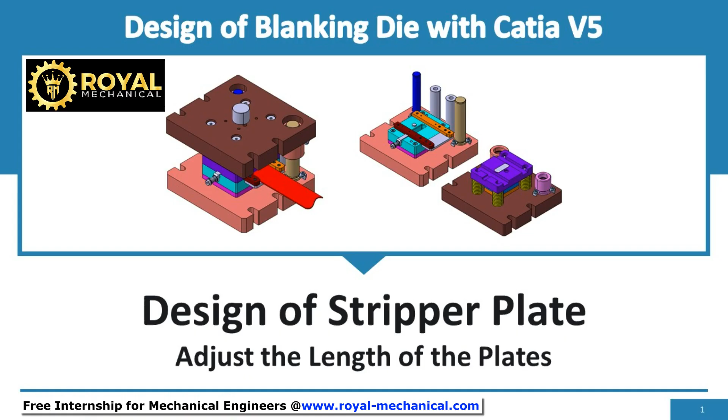Welcome. In this e-learning module, I shall demonstrate and understand how to adjust the length of the plates. In the previous lesson, we had assembled the precision shoulder bolts and the stripper springs.

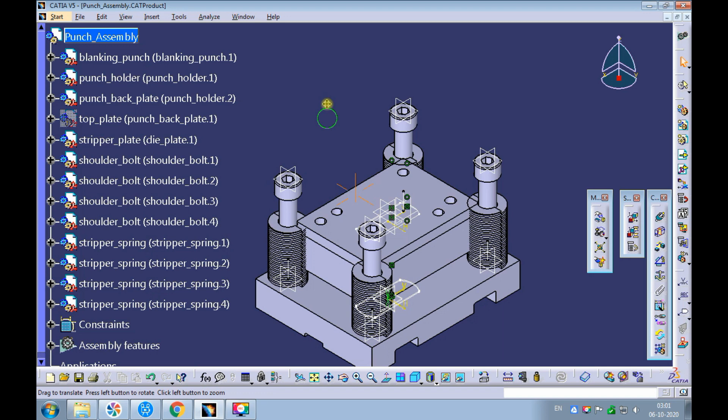Hide the top plate. Observe there is an interference between the springs and the punch holder and the punch back plate. By increasing the length of the stripper plate, we can avoid this interference. Right-click on the stripper plate and open it in the new window.

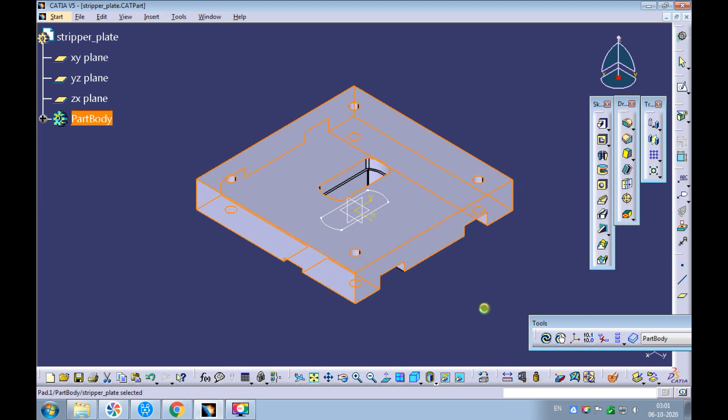Increase the stripper plate's length by 40 mm, by adding 20 mm to both the horizontal dimensions which define the length of the stripper plate. Swap the window to the punch assembly. Update the assembly. Observe the interference has been eliminated.

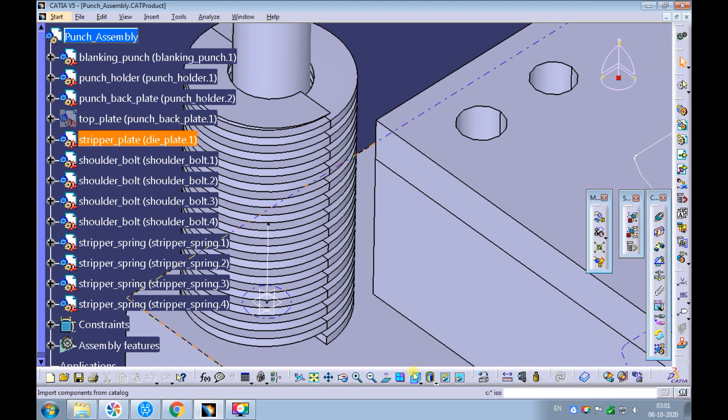Measure the distance between the stripper spring and the edge of the punch backplate. The measured distance is 8.29 mm. It is better to maintain a 5 mm to 10 mm gap. Hence the design is OK. Unhide the top plate. Right-click on the top plate and open it in the new window.

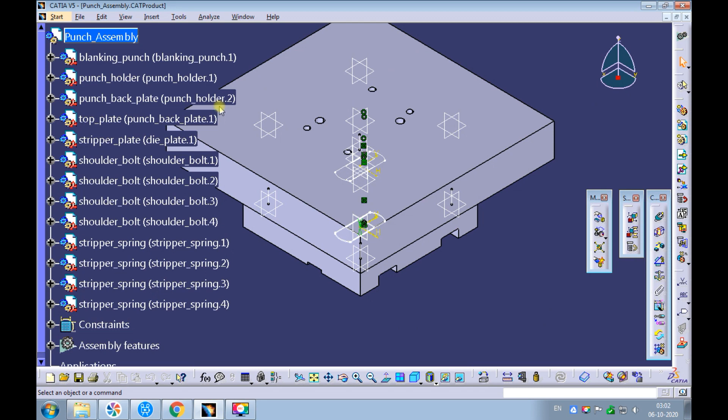Increase the top plate's length by 40 mm by adding 20 mm to the horizontal dimensions which define the plate's length. Observe the length of the top plate is 304 mm. Swap the window to the punch assembly. Set the view to isometric and fit all in.

Save the punch assembly. A warning appears indicating the parts of the punch assembly have been modified. Saving only the assembly might not save the parts of the punch assembly. Cancel the warning. Use the File, Save As option to save all the modified documents. Close the top plate and the stripper plate.

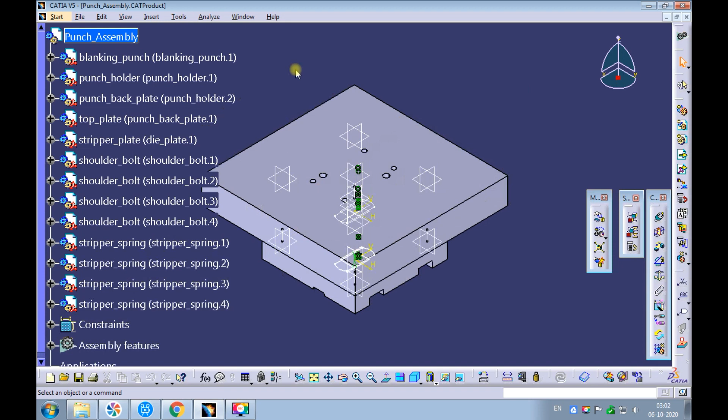Swap the window to the press tool assembly. Observe the stripper plate is longer than the die plate. It is always better that the length of the die plate and the stripper plate be the same. Swap the window to the die assembly. Right-click on the die plate and open it in the new window.

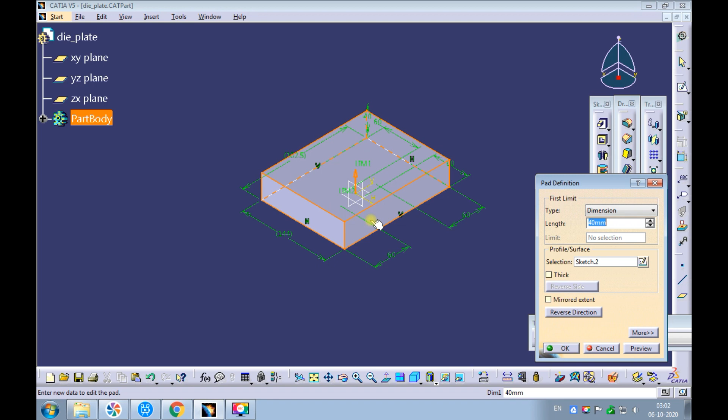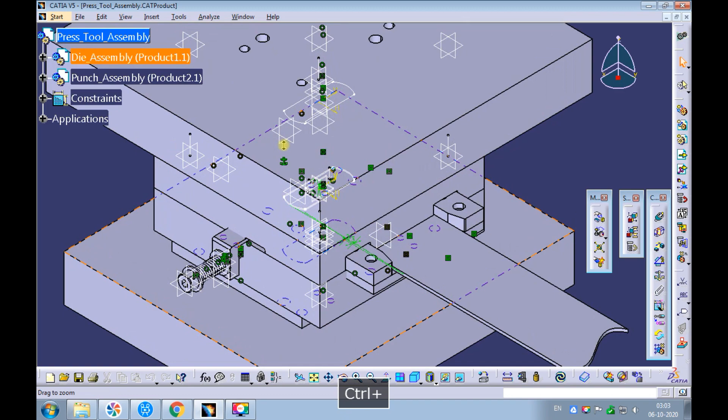Increase the length of the die plate by 40 mm by adding 20 mm to the horizontal dimensions that define the die plate's length. Swap the window to the press tool assembly. Observe the length of the die plate and the stripper plate is the same.

Swap the window to the die assembly. Right-click on the die backplate and open it in the new window. Increase the length of the die backplate by 40 mm by adding 20 mm to the horizontal dimensions that define the die backplate's length.

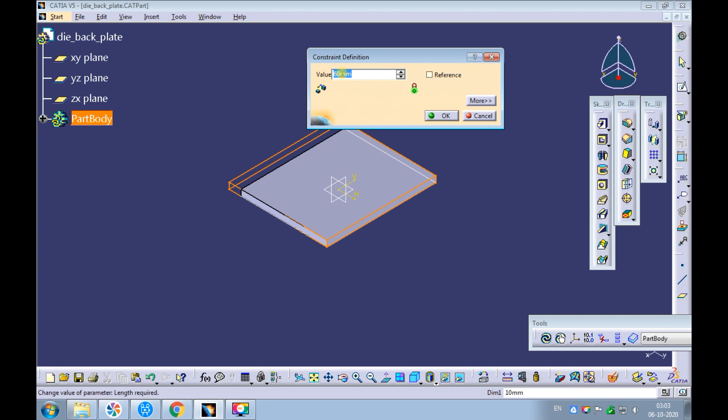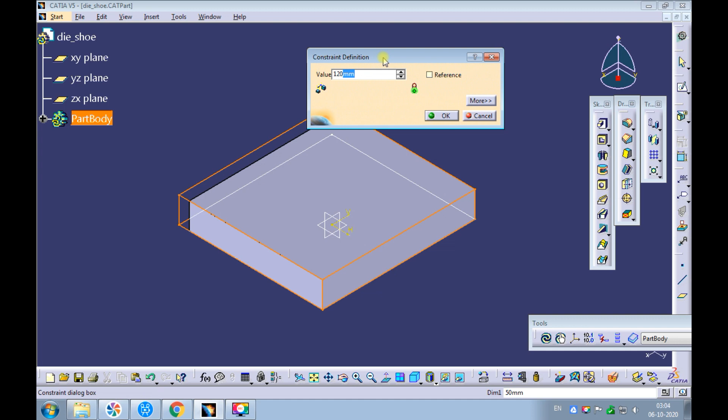Swap the window to the die assembly. Right-click on the die shoe and open it in the new window. Increase the length of the die shoe by 40 mm by adding 20 mm to the horizontal dimensions that define the die shoe's length. Observe the length of the die shoe is 304 mm, the same as the top plate's length.

Swap the window to the die assembly. Update the assembly. Right-click on the front strip guide plate and open it in the new window. Increase the length of the front strip guide plate by 40 mm.

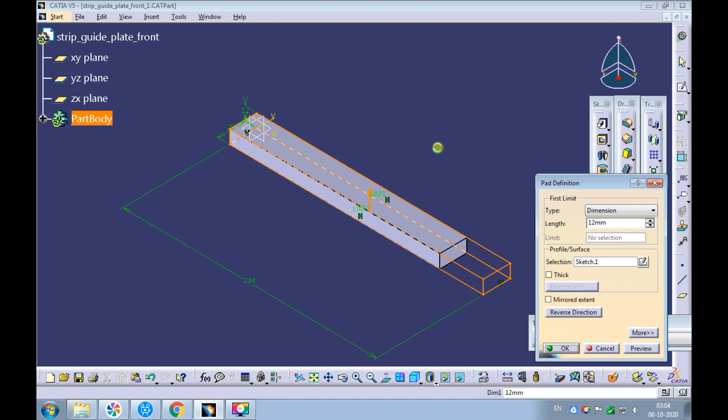Swap the window to the die assembly. Right-click on the rear strip guide plate and open it in the new window. Increase the length of the rear strip guide plate by 40 mm. Swap the window to the die assembly.

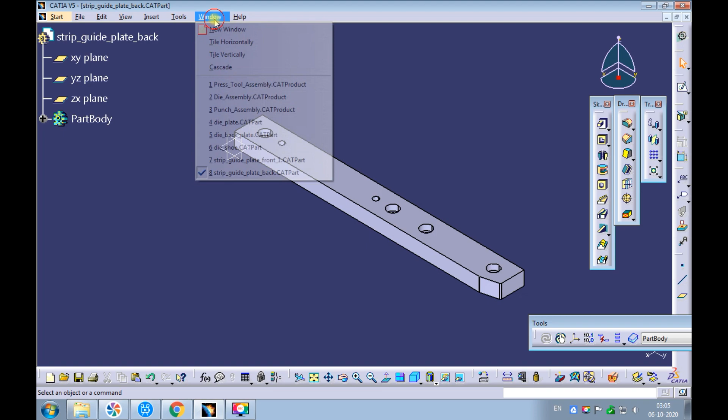Observe the strip pusher and its slot on the front strip guide plate are not matching. Also, the fastener holes on the strip guide plates and the die plate are not matching. Swap the window to the front strip guide plate. Add 40 mm to the horizontal dimension which defines the fastener locations.

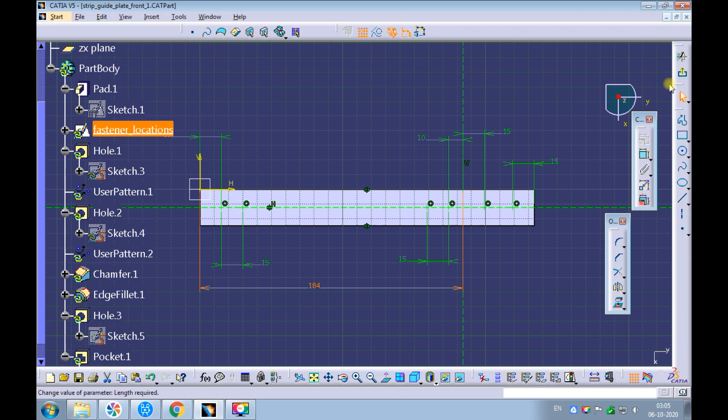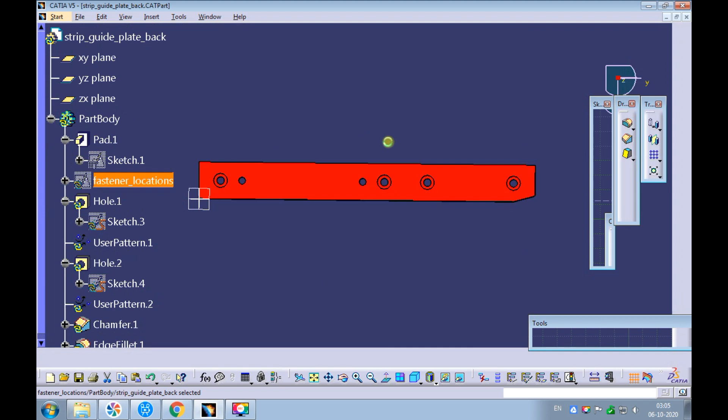Swap the window to the rear strip guide plate. Add 40 mm to the horizontal dimension which defines the fastener locations. Swap the window to the die assembly. Observe the fastener holes are aligned.

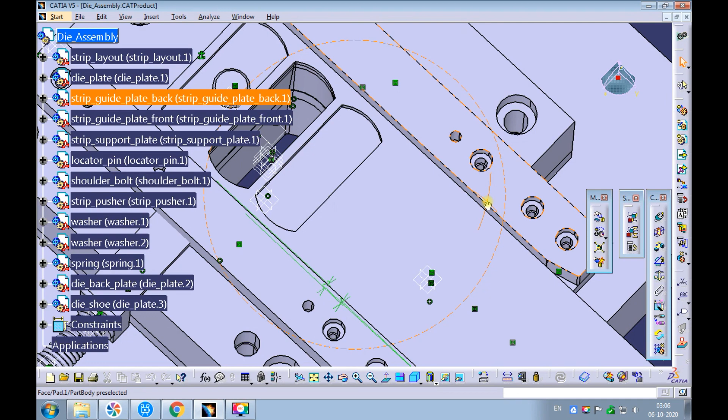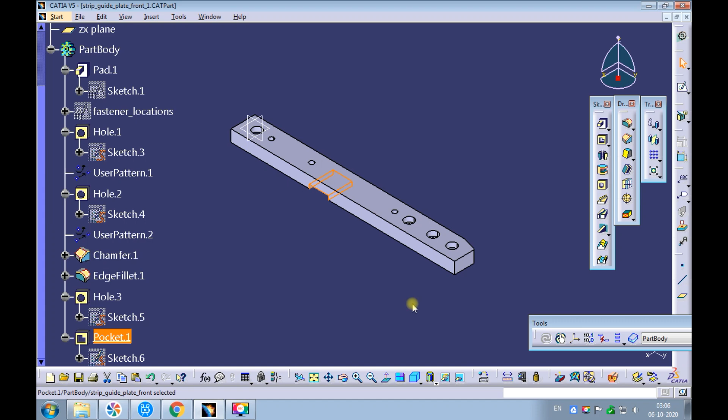Let's align the strip pusher and its slot on the front strip guide plate. Swap the window to the front strip guide plate. Add 20 mm to the horizontal dimension which defines the position of the strip pusher slot. Swap the window to the die assembly. Observe the strip pusher and its slot on the front strip guide plate are aligned.

Swap the window to the press tool assembly. Observe the strip pusher and its slot on the stripper plate are not matching. Let's align them. Right-click on the stripper plate and open it in the new window.

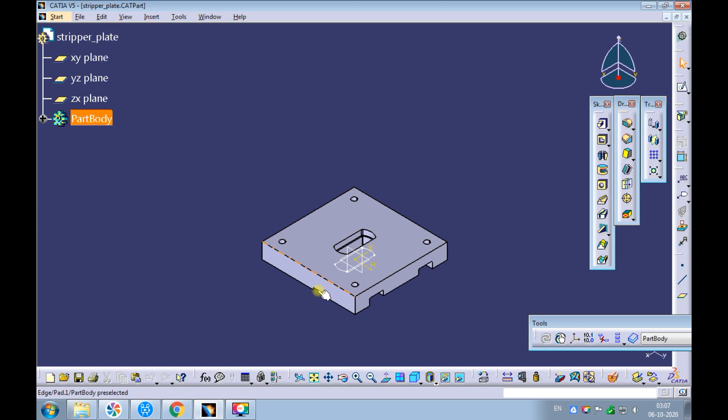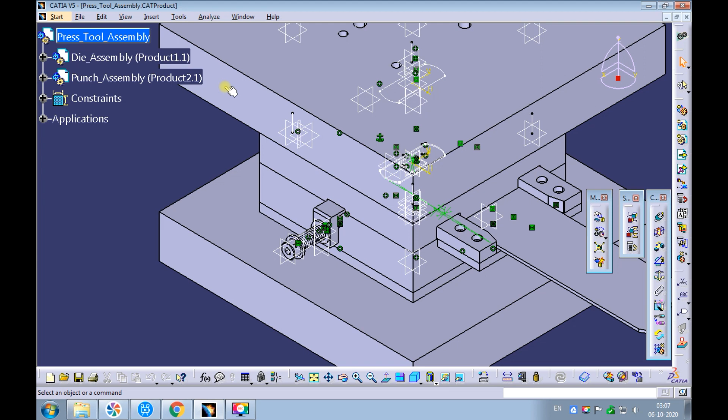Add 20 mm to the horizontal dimension which defines the position of the strip pusher slot. Swap the window to the press tool assembly. Observe the strip pusher and its slot on the stripper plate are matching. Click on the File, Save All option, and save all modified documents in session.

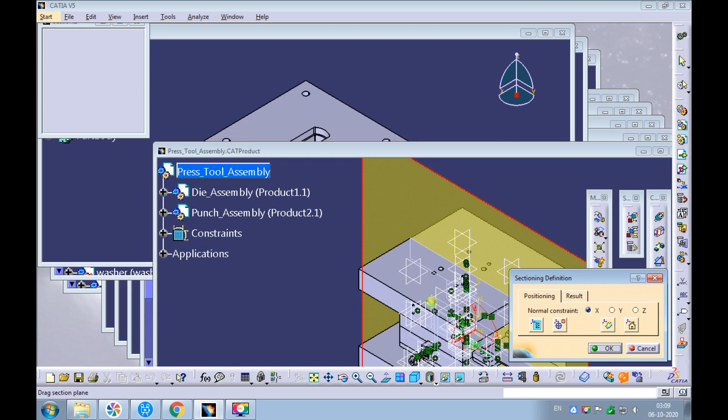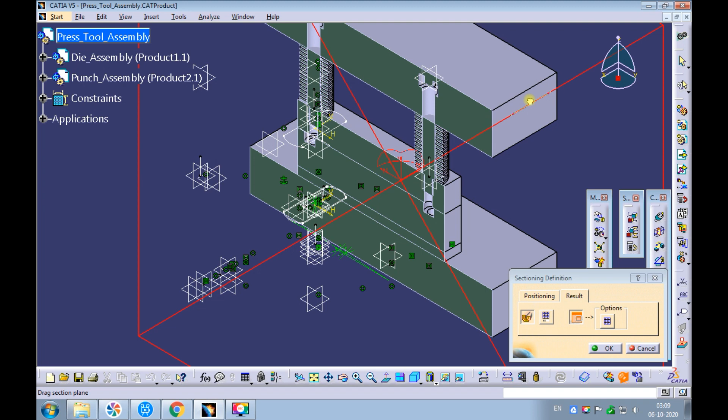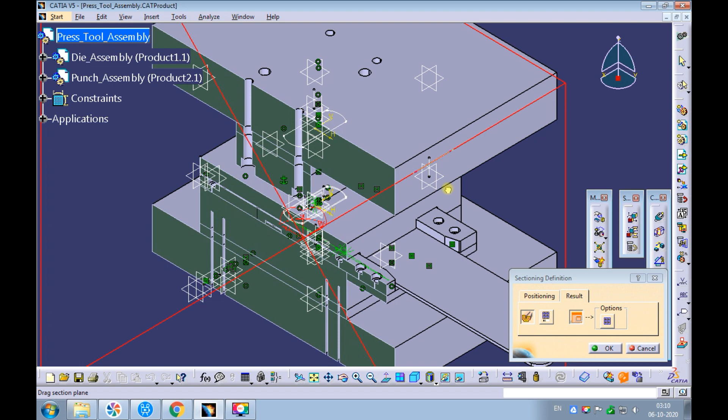Pick the sectioning command. Pick Volume Cut on the Result tab. Observe all the holes are aligned correctly in the press tool assembly. Close all the part files.

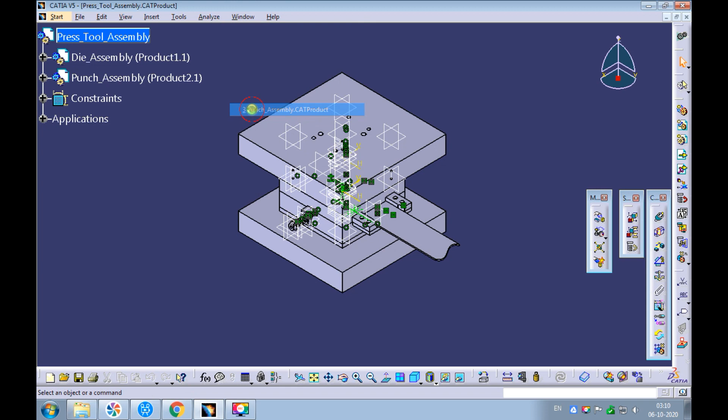With this, we have successfully adjusted the length of the plates.